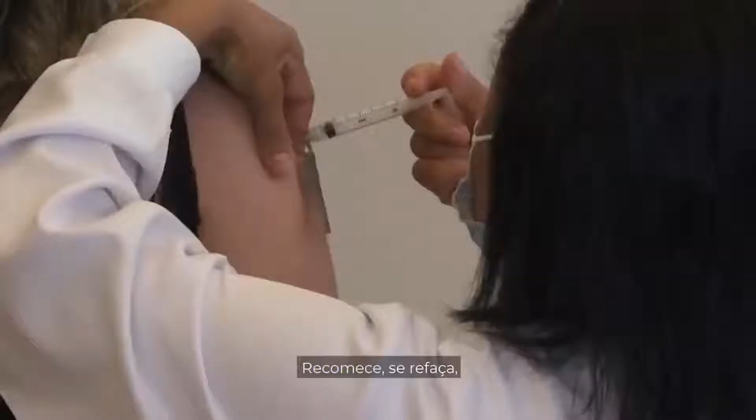Nem sempre engatar a ré significa voltar. Remarque aquele encontro, reconquiste um amor, reúna quem lhe quer bem, reconforte um sofredor, reanime quem está triste e reaprenda na dor. Recomece, se refaça, relembre o que foi bom, reconstrua cada sonho, redescubra algum dom, reaprenda quando errar, rebole quando dançar. E se um dia lá na frente a vida der uma ré, recupere sua fé e recomece novamente.

Boa noite, tudo bem? Eu me chamo Thaís Fontinelli, sou atual assessora da Comissão Científica da 11ª Semana de Engenharia Civil da UFC. Gostaria de agradecer a todos pela presença em nosso momento de competições, bate-papo e transmissão da final do Aqualibrium Water Competition. Esse ano, a SEC, como carinhosamente chamamos este evento, traz um tema muito instigante, como vocês puderam ver em nosso vídeo institucional: Engenharia da Resiliência, o intercâmbio de experiências como caminho para a readaptação.

Eu poderia falar inúmeras palavras para tentar explicar melhor o significado do nosso tema, mas uma pessoa em especial mandou um vídeo que eu tenho certeza que vocês conhecem e falou um pouco sobre o tema e mandou uma linda mensagem para vocês.

A palavra do ano é resiliência. Mais do que a palavra, a ideia. Se a humanidade hoje conta com uma vacina, é porque houve pesquisa. E pesquisa, como todo mundo sabe, é tentativa, erro, até chegar no acerto. A isso se dá o nome de resiliência. Da mesma forma que na ciência, também nas artes, e por que não na engenharia civil? Afinal, é justamente trocando experiências entre áreas que parecem díspares, mas que na realidade são a experiência humana, que a gente chega aonde a gente vai para frente. Eu vejo a vida melhor no futuro.

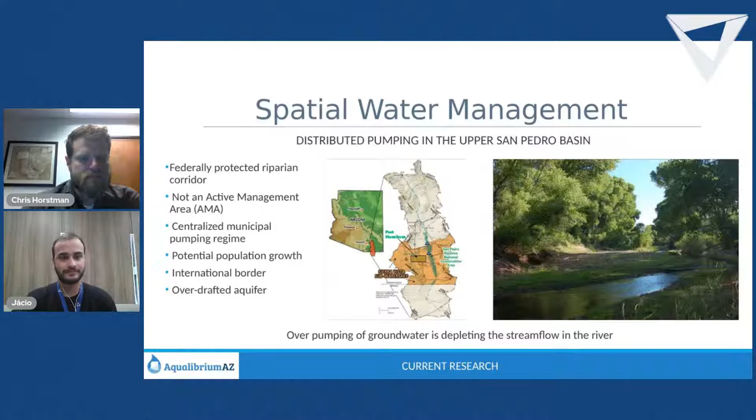So this is where my research is—basically Aqualibrium, but on a really big scale. What I'm doing is working with a network that doesn't exist yet. We decide all these little dots of where we can pump potentially, how much, and when do we do it. Then we have to connect all the pipes and make sure the pumps and everything is working correctly. It may not look like it because the Aqualibrium tower comes from up here, but our water comes from the ground, so it's basically the same thing—pumps instead of water towers, and then lots of pipes, to make sure everyone gets their water, and we can make sure that the river is still safe.

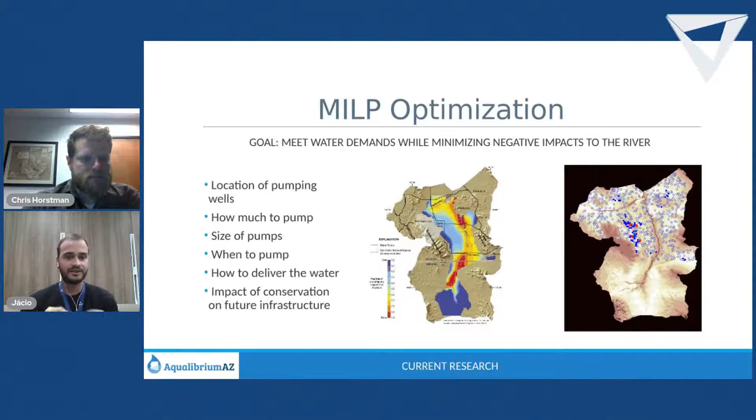So, in the United States, college is very expensive. I've been working my whole time doing my PhD. I work for a very small water company here, actually founded by a friend who I met while he was doing his PhD. We work mostly in rural areas, mostly native-owned land where a lot of people don't have access to running water, and so we spend a lot of time on that. This is very close to how Aqualibrium's idea was—to help rural communities understand their water supply. And as you can see on the right, we use Aqualibrium in practice every day, just on a much bigger scale. So we do water networks a lot—that's kind of where I'm at now.

Loving my job, teaching people about water, trying to graduate. Thank you so much for inviting me. I also want to wish best of luck to the teams, and I'm excited to be a part of this year.

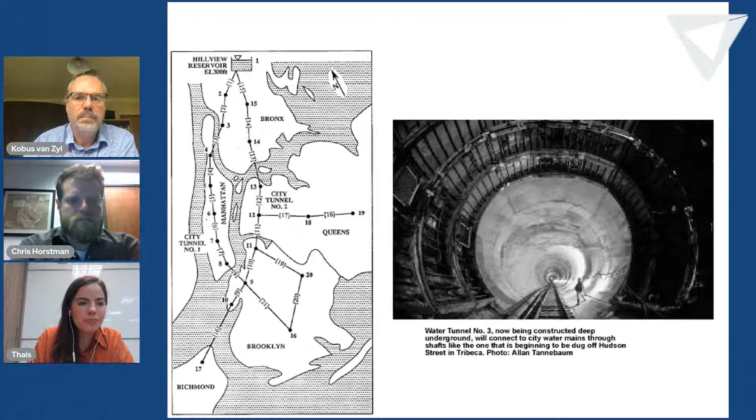So this slide shows, on the left, a schematic view of the current system with the different pipes, and on the right there's a bit more detail. There are 21 of these tunnels between these nodes, and as I've said, the question was, where should they install parallel tunnels and which diameters should they use? There are 16 possible diameters that they can use for each of the tunnels.

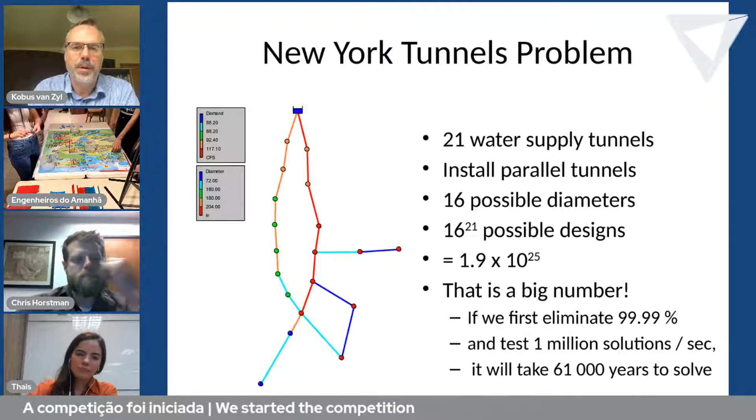Great. So just to show how big this number is, even if we eliminate 99.99% of the possible combinations of pipes because we say they won't work, or they're too small, or they're too expensive, and we can test 1 million solutions per second, it will take 61,000 years to solve all the possible solutions.

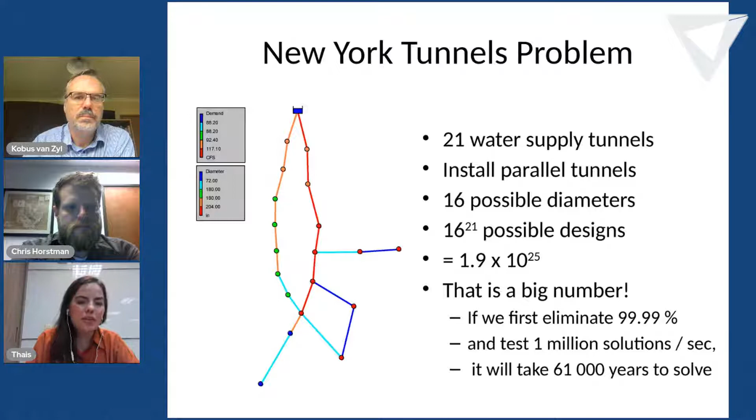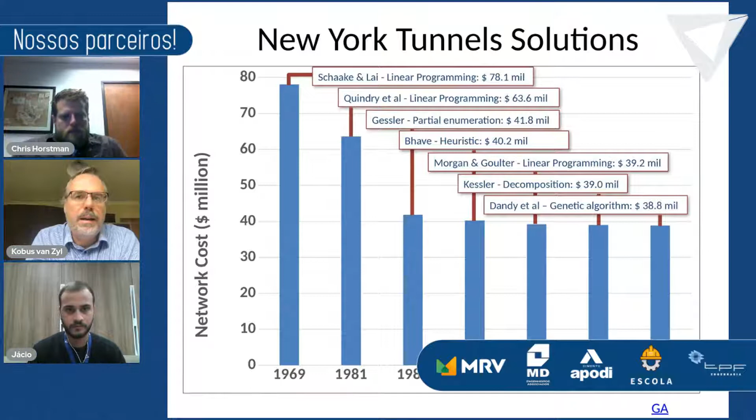Okay, so this shows the history. This is the cost on the left-hand side, and on the bottom it shows the year, which is not visible for all of the years, but I can tell you it goes from 1969. The best solution people were able to come up with was, in that time's money, $78 million. Then you can see that people used linear programming, enumeration, heuristics, and other techniques. And until not so long ago, the best solution was found using a genetic algorithm.

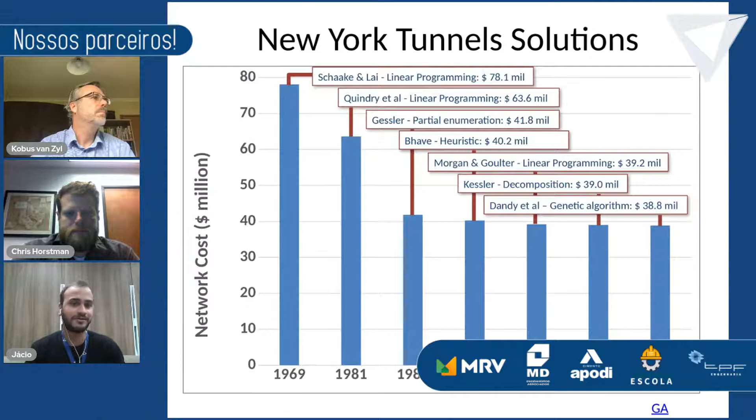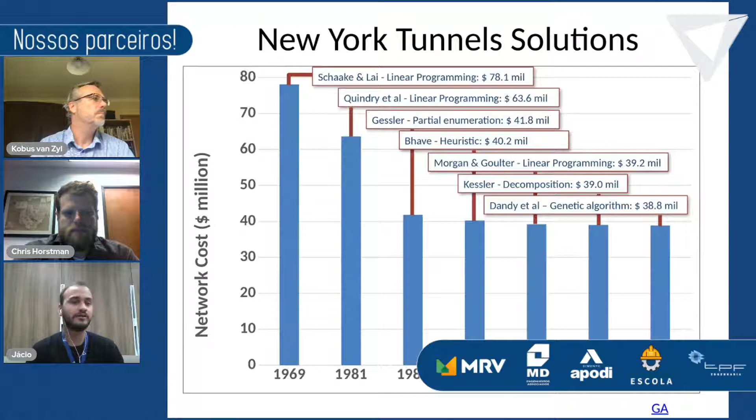And that was done in 1996 by Graham Dandy and Angus Simpson and one of their students at the University of Adelaide in Australia. And they used a genetic algorithm, which is an optimization technique that mimics natural selection processes. And as organisms adapt to their environment, they use the same processes to find solutions to complex problems like this.

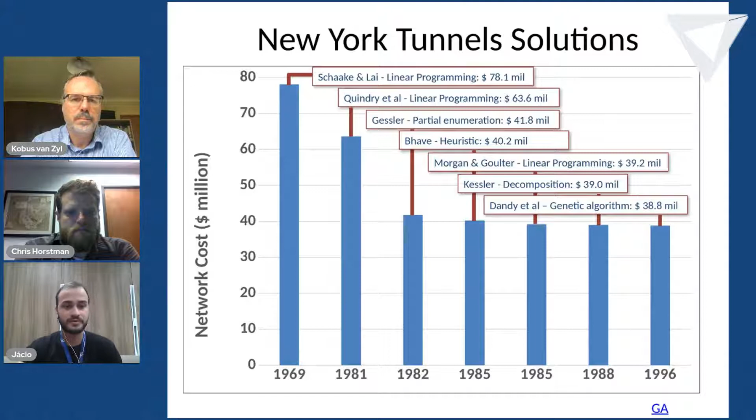And this is exactly the same, this is Angus Simpson. He's at the University of Adelaide, and this was the first time we ran the Aqualibrium competition at an international conference. This was his conference in Adelaide. And he's the world record holder, one of the team for the New York tunnels problem, and here he is trying the Aqualibrium competition.

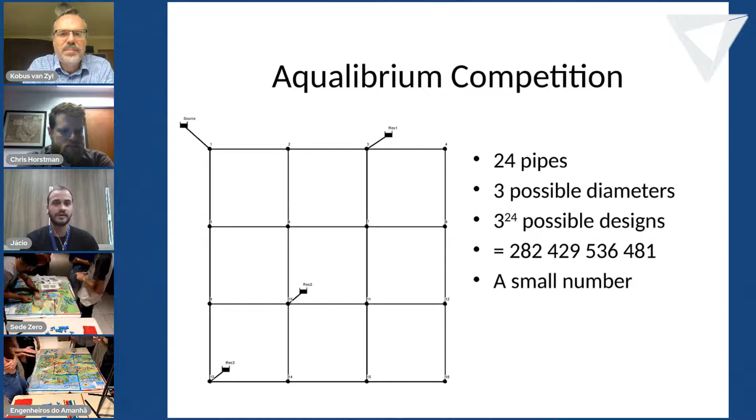So the challenge the students are facing, even though it's very simple to do, and even primary school children love this competition, and it's fun to do, the underlying problem is very, very complex. So the teams really have a big challenge.

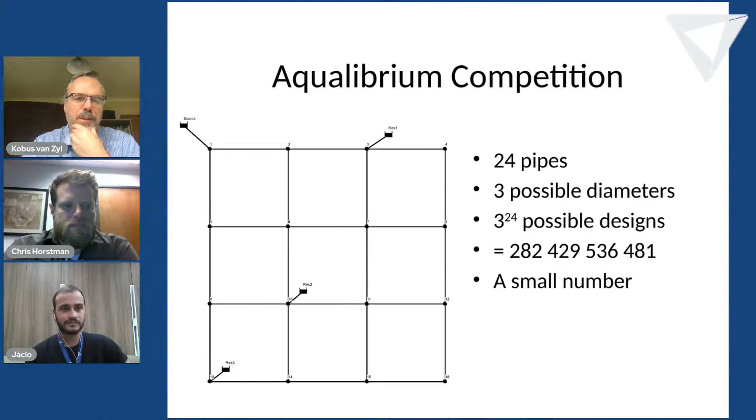So that shows you the real-life application. The Aqualibrium competition is really solving something very similar to real life. Now I want to talk about some of the other activities we are currently exploring with a group of students that we can use Aqualibrium for in teaching hydraulic engineering.

I have to immediately say that some of the pictures are not very good because we are still in the development phase, but I think they're good enough to show what we are finding, and I think you'll appreciate that.

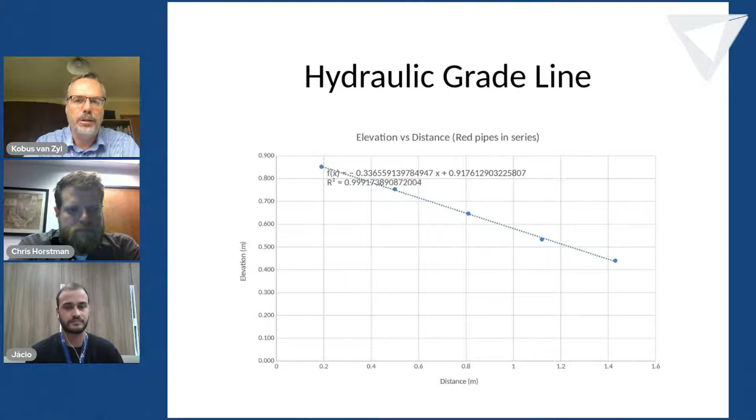I remember the Moody diagram. I cried a lot studying this subject. I remember.

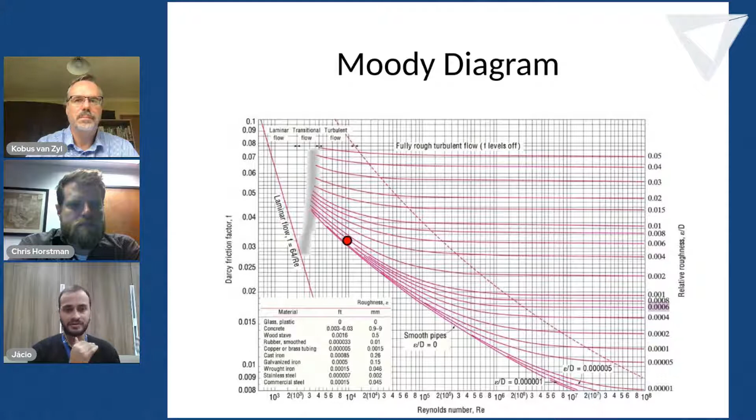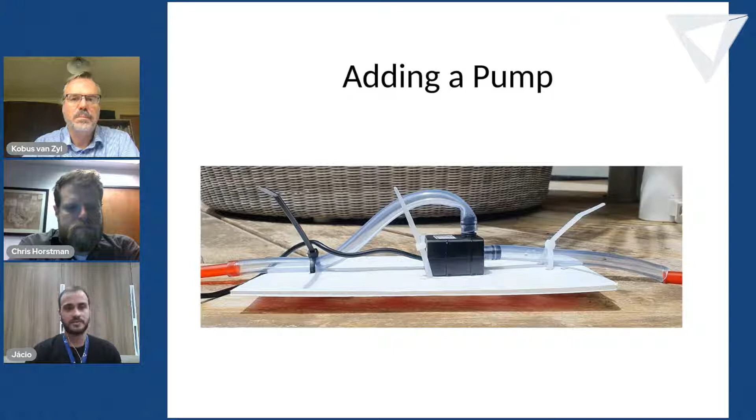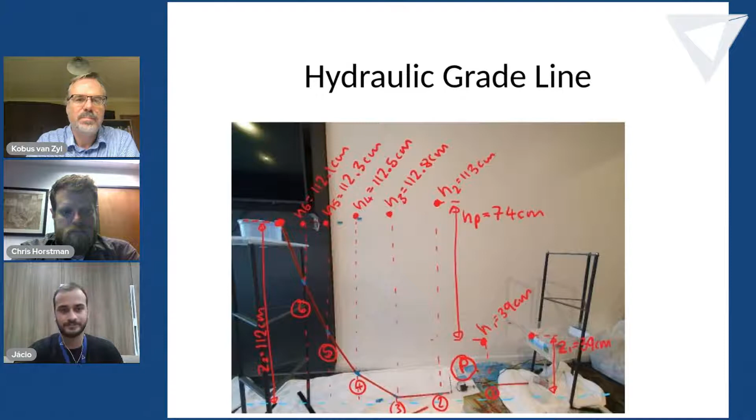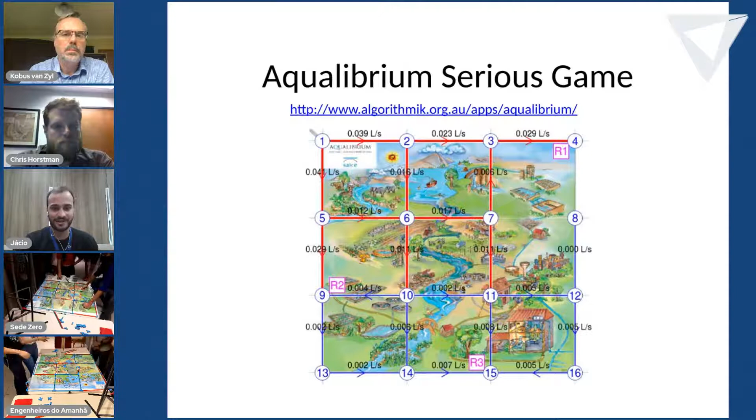And then finally, just something about an invitation to join the Aqualibrium movement. One of the nicest things I've had was students going out to schools to show what do civil engineers do, where does water come from, what happens with water when you finish using it, and why do you need math and science in school to be able to solve engineering problems. So I invite you to also get involved and use Aqualibrium to reach out to schools and communities and others.

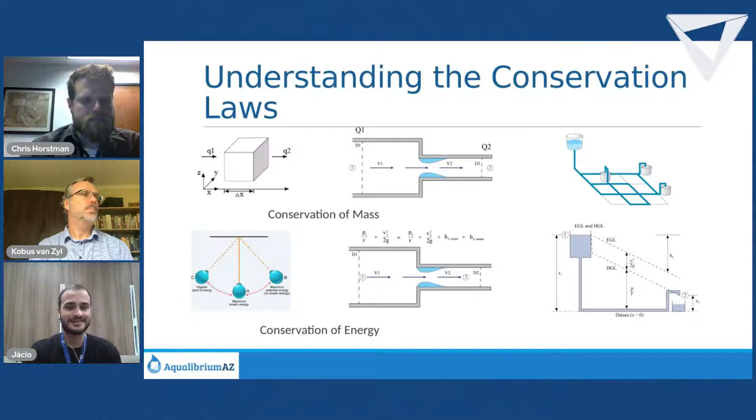One thing when I first started getting into water education is there's a question you can ask a lot of people in the United States: where does your water come from? You turn on the faucet and it's magic. Almost none of the students have any concept of it. They're very removed from it. So I start at the household level, in your kitchen, and then we work ourselves all the way up to see what's really going on with our water.

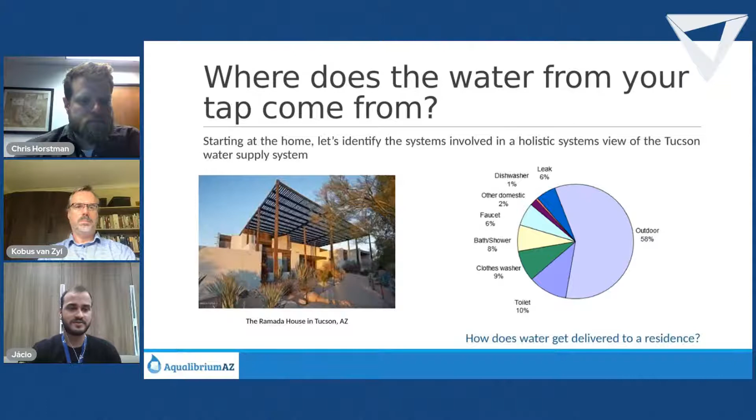Here in Arizona, a lot of us rely on one big river, the Colorado River, that serves millions and millions of people, about 33 million. So understanding the health of our river, what's going on with our climate, really impacts how much water is able to get to our taps. I like to give them a broad range of the systems that feed into our water networks.

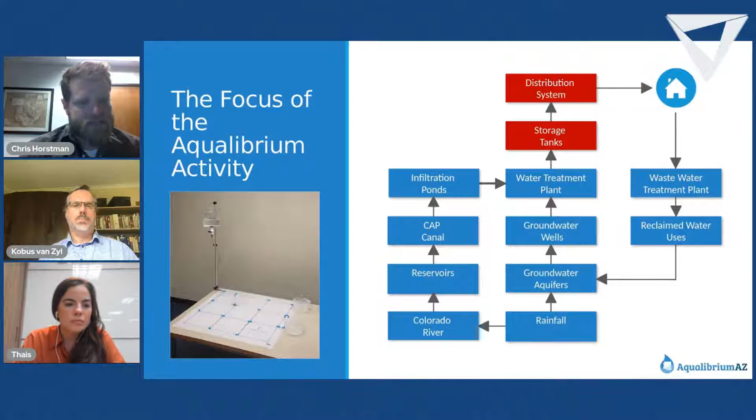So when I try to talk about all these things, I want to put Aqualibrium in the context of all this stuff we're talking about. Throughout the week, as students do this learning lesson, you can see Aqualibrium fits into all these things that are important and crucial to our water, but none of it can get to your house without it. The two boxes in red represent the actual building of the Aqualibrium network. But all those other things go into it, and as difficult, fun, and challenging as Aqualibrium is by itself, there's still so much more to consider.

So I kind of try to put Aqualibrium, kind of create a context for everyone and put Aqualibrium in it.

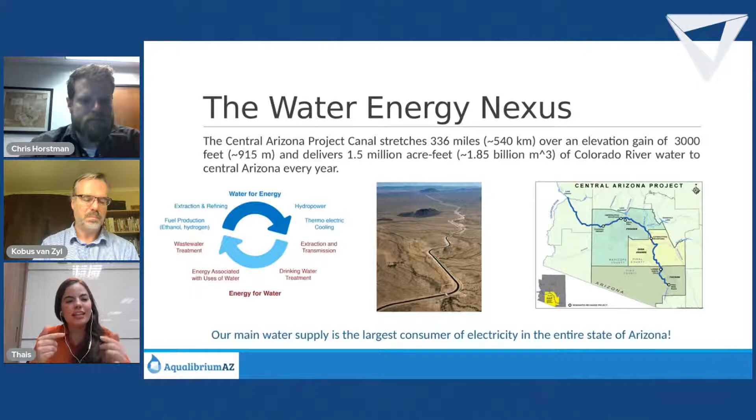And so we also kind of talk about, I do like to talk about hydrology a little bit too, just because desert hydrology is very unique to the different deserts around the world. Knowing that changing temperatures and all these things can impact the amount of water that you're starting with in your Aqualibrium reservoir. And as you can see, we have these big, huge lakes here in the Southwest, and you can see that white spot, that bathtub ring, is how low the water is. And we're dangerously low, close to running out. So it's more and more important every day to understand.

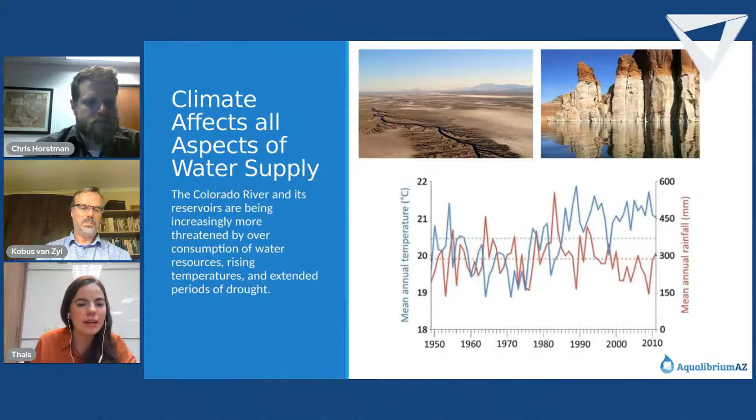And then another thing, very close to my heart from where I work. My coworkers are all from the Navajo Nation in Arizona. It's almost its own country, and upwards of 40% of people, like even my boss, grew up without running water to their house. They had to drive and get it, back and forth.

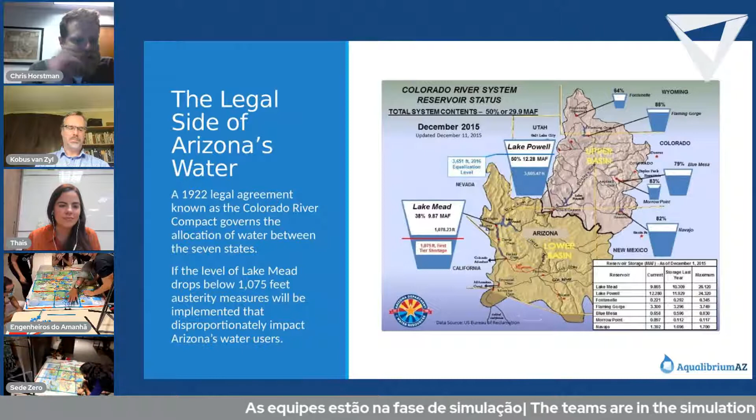And I feel like the students really, this is sort of where we end, and they tie in Bernoulli's equation to how they get water to their home and all these things, and hopefully take that home and yell at their parents for running the water when they brush their teeth or things, whatever. So that's all I have for today. I just want to thank you for letting me share some of my outreach stuff that we do here, and I'm really excited to be here.